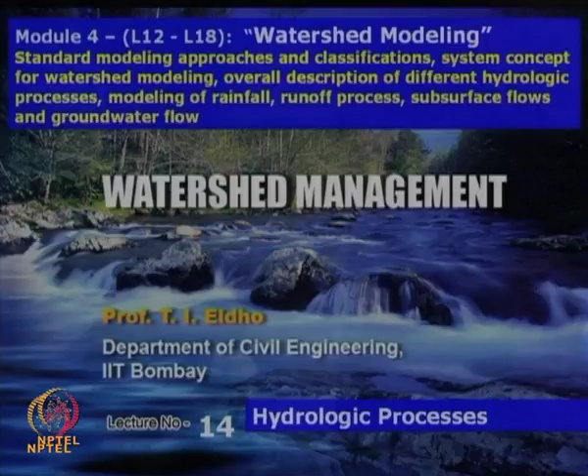In module number 4, lecture number 14, today we will discuss hydrologic processes. Various topics covered in today's lecture include hydrologic cycle, hydrologic processes, precipitation, interception, infiltration, evaporation, transpiration, evapotranspiration and runoff. Some of the important keywords for today's lecture: hydrologic cycle, precipitation, infiltration, evapotranspiration and runoff.

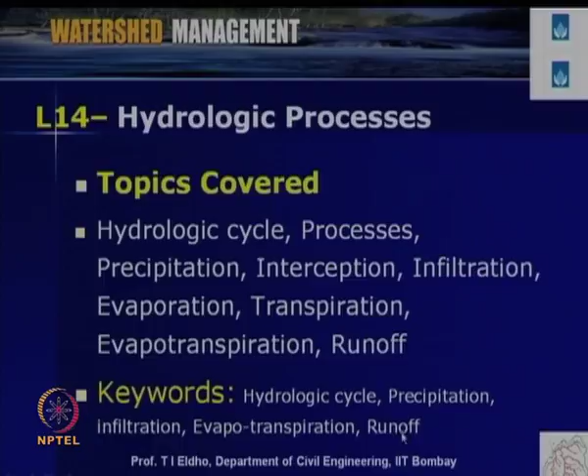As we already discussed related to watershed management, water is one of the most important resources as far as a watershed is concerned. For a watershed or any area, the main source of water is precipitation or rainfall. As we have discussed earlier, when the rainfall takes place, various hydrological processes will be taking place once that rainfall is transformed into runoff.

A number of processes will be there in between, like interception, evaporation, evapotranspiration, infiltration, percolation. So many processes are there. These processes actually decide how much will be the runoff for the given rainfall condition. The hydrologic information we are looking for is the water as a resource for watershed planning and management. Hydrologically, the watershed we can conceptualize as we discussed in the last lecture.

Once we do a conceptualization of the watershed, like the boundary of the watershed, the drainage network, the area of the watershed and various topographical and geographic conditions, then when we consider water as a resource, we have to see the various hydrological processes taking place within the watershed. From precipitation to runoff, as I mentioned already, there are a number of processes like evaporation, transpiration, interception, infiltration, etc.

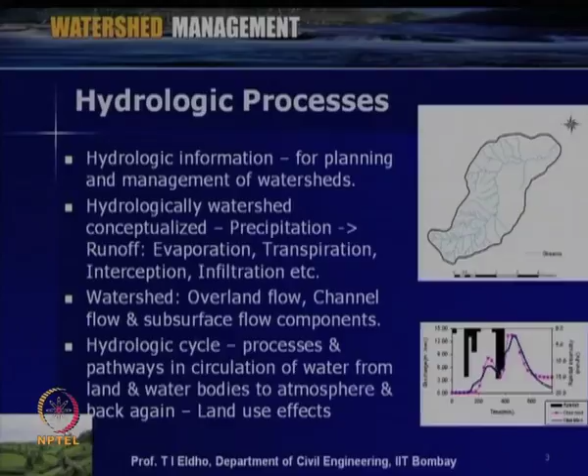Of course, as far as the various processes are concerned, land use has a considerable effect on the watershed. The various processes that can take place within the watershed depend upon the land use and the topographical conditions.

Within this context, the rainfall is taking place, then before the runoff is formed, evaporation takes place, then interception from the various vegetation, and then infiltration, and then finally the runoff starts, and that runoff joins the drainage network or the river, and that river finally flows towards the sea or the ocean. That is the way the various hydrologic processes take place within the hydrologic cycle. Everything is within the hydrosphere.

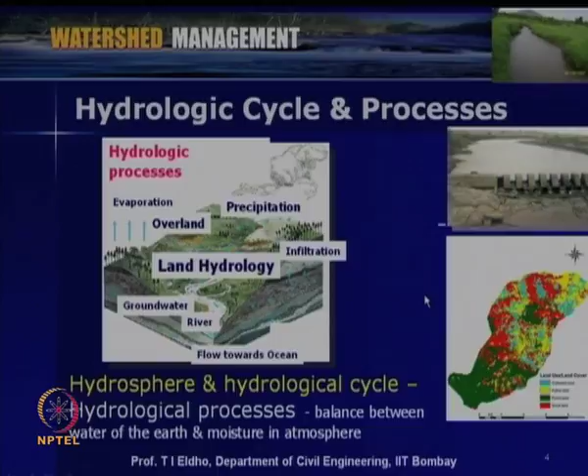There is a balance between the water of the earth and moisture in the atmosphere due to this hydrologic cycle. Of course, precipitation varies with respect to space and time, but overall there will be a balance between the water of the earth and the moisture in the atmosphere within the hydrologic cycle.

As we have seen, the most important aspect of water as a resource for a watershed is precipitation. Precipitation can be either in the form of rainfall or snowfall. We call it rainfall when the water droplets have a diameter of more than 0.5 mm, and we call it drizzle when it is less than 0.5 mm.

And then it can be either in the form of snow, that means in ice form, or sleet, or hailstone, or dew. So, various conditions can be there. So, overall, everything including rainfall and snowfall, we together call it precipitation.

As I mentioned, precipitation is the main source of water as far as the watershed or the earth is concerned. Out of these many forms, rain and snow are the most important forms of precipitation when we consider a watershed or the land. Precipitation happens when specific conditions take place within the atmosphere.

What is happening is that the water evaporates on the surface of the earth or the surface of the ocean, goes to the atmosphere, and then condensation takes place. Precipitation happens only during some specific conditions, like humid air cooled to dew point and formation of nuclei, and then droplets are formed into raindrops, and finally when the raindrops reach a certain size, only then precipitation happens.

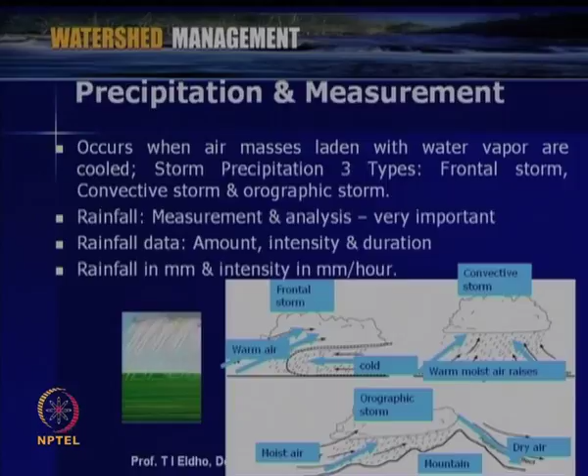So, generally we describe the rainfall in terms of depth of water, in millimeters, and the intensity of rainfall generally in millimeters per hour. So, as I mentioned, we have to measure the rainfall and quantify how much rainfall is taking place at particular locations. Rainfall we can measure as the vertical depth of water collected on a level surface. So, generally we measure the rainfall using equipment called rain gauges.

If you go through the hydrological literature, we can see there are two types of rain gauges. The first one is called the non-recording type rain gauge. Here, we collect the rainfall over a known period of time, so we cannot directly get the intensity, since we are simply collecting the rainfall. For example, this is the India Meteorological Department (IMD) standard gauge.

So, there is a collector with a gunmetal rim. This is the collector, and then there will be a funnel like this. And then there will be a polythene bottle where we can transfer this and find out how much is the rainfall. The collector area can vary from 100 square centimeters to 200 square centimeters, and the polythene bottle can be 2 liter, 4 liter and 10 liters, and measurement is by graduated measuring cylinder.

So, what we do, we install this rain gauge at a particular location without obstruction, in an open area, and then once a day at a particular time we measure how much rainfall took place, and that gives the total quantity of the rainfall.

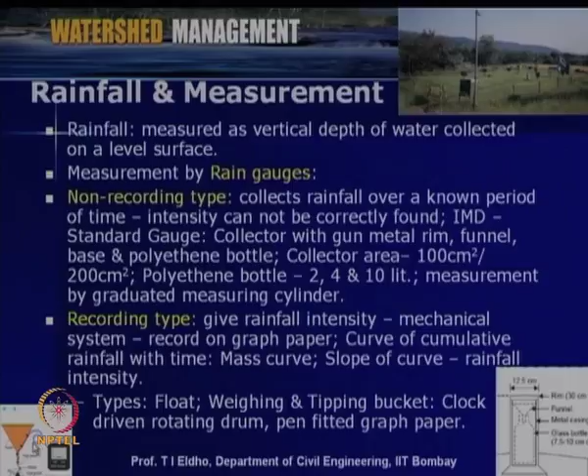So, some of the important terms as far as rainfall or precipitation is concerned: first is the rainfall intensity, second is the duration, and third is the frequency. Rainfall intensity, as I mentioned, is the rate at which rainfall occurs, generally in millimeters per hour. Duration is generally prescribed in number of hours or number of days. Another important term in hydrology is the so-called return period or recurrence interval.

This is the period within which the depth of rainfall for a given duration will be equaled or exceeded once on average. So, that is the definition of the return period or recurrence interval.

So, if T is the return period in years, we can put it in this form: T is equal to (n plus 1) by m, where n is the total number of hydrologic events and m is the rank of events arranged in descending order of magnitude. From that we can find the frequency or the probability of occurrence of an event. In percentage, we can put P is equal to 100 by T. So, this is in percentage, and that indicates the possibility of a return of a rainfall.

Then the intensity of a storm gives the return period and storm duration. We can have charts based upon the historic data. We can assess the historic data, for example, for 5 years, 10 years, 50 years or 100 years, and then we can identify, for a particular location or area, how the rainfall pattern is, the maximum intensity, average intensity, minimum intensity, and then we can find average annual rainfall. So, once we get the measured data from a rain gauge station, we can get various details as far as the rainfall pattern for the considered watershed.

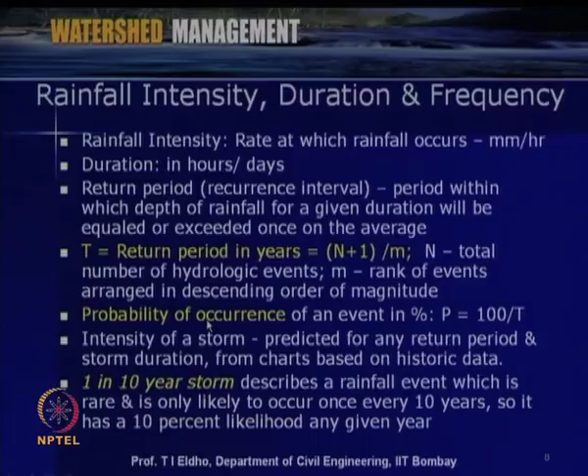For example, if the probability of occurrence is a 1 in 10 year storm, that describes a rainfall event which is rare and is only likely to occur once every 10 years. So, it has a 10% likelihood for any given year. Like that, once we get the rainfall data, we can assimilate it and then identify the rainfall intensity, average annual rainfall, the rainfall duration, the rainfall frequency, etc.

Then another important aspect is the average depth of rainfall over an area. When we go for hydrologic modeling, we can see that for the particular location which we consider, there may not be a rain gauge. So, in that case we may have to consider some averaging of the rainfall pattern for the given storm condition. The reason is that there are large differences in rainfall within short distances. Whenever we go from one location to another, there will be huge variation as far as the quantity of rainfall and rainfall intensity is concerned. That is why we may have to consider the average depth of rainfall for a particular location. Generally, three methods we use to get this average depth of rainfall.

The first one is called arithmetic average. For a particular area, we can identify the nearby rain gauge stations, and for a particular given storm, we can identify the rainfall in all those nearby rain gauge stations. Then we get the arithmetic average by simply adding all the rainfall for the given storm condition and dividing by the number of stations. So, that is a simple average, called the arithmetic average. Generally, with this arithmetic average the accuracy will be very less, since we simply sum the rainfall for the given storm and divide by the number of stations. But there are more accurate methods like the Thiessen method and the isohyetal method.

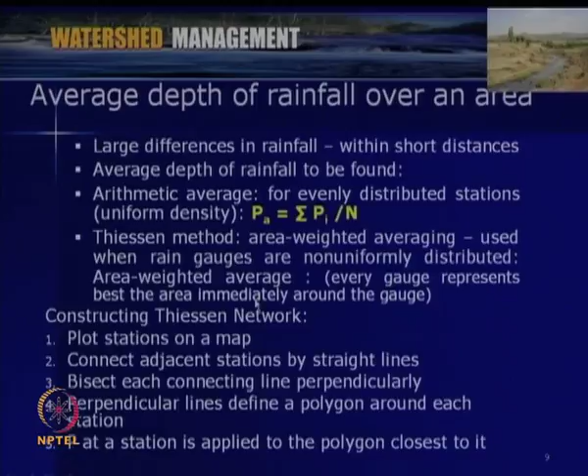Then the rainfall P at a station is applied to the polygon closest to it. This figure shows how we do it using the Thiessen method. The average depth of rainfall in that particular area will be P = (A1 P1 + A2 P2 + ... + AN PN) / A, where A is the total area of the watershed. P1, P2 to Pn are rainfall depths in the polygons having areas A1, A2 to AN within the watershed.

So, if we do not have a large number of rain gauges for a given watershed, we can use the adjacent nearby rain gauge stations, identify how much is the rainfall for a given storm at those rain gauge stations, and then we can use this method.

The third method is called the isohyetal method. Here, at various stations we get the rainfall for the given storms, record the depth of rainfall at the locations of different rain gauges, and then plot contour lines called isohyets. These are the lines of equal rainfall. For example, a 50 centimeter isohyet, then a 45 centimeter isohyet, then a 40 centimeter isohyet. We can plot the isohyets over the area which we consider.

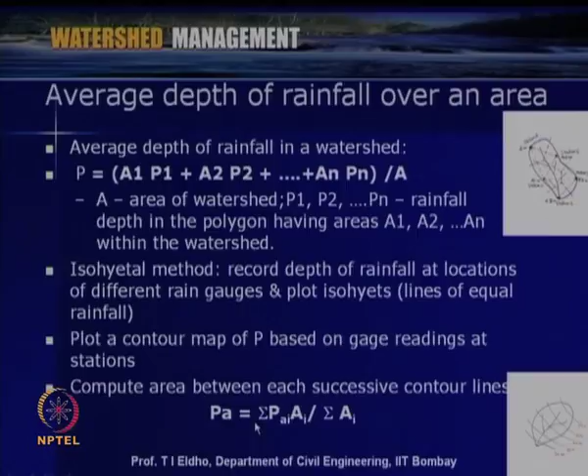This will be a somewhat more accurate method, since we are getting these isohyets and the areas from them. So this formula gives the average rainfall using the isohyetal method. That way we can identify the rainfall for a particular station, location or watershed using either the arithmetic average, the Thiessen polygon method or the isohyetal method.

Once we get the rainfall for the particular watershed, to identify how much will be the runoff, we can look into the various hydrologic processes taking place within the watershed. As I mentioned earlier, in the transformation of precipitation to runoff a number of processes will be there. We consider the important processes for the particular watershed, and then quantify the losses, like interception losses, evaporation losses or infiltration losses. Based upon that we can identify how much runoff will be coming to the outlet of the watershed.

From that we can assess how much water there is if we are going to construct, for example, a check dam at the outlet. So this much storage is possible with respect to the given rainfall condition.

Now, considering the various hydrologic processes, we will discuss some of the important ones, along with the available important equations for quantification and the methodology. We will identify how to go through the various processes, and then finally how much will be the runoff. So now we will discuss the various hydrologic processes.

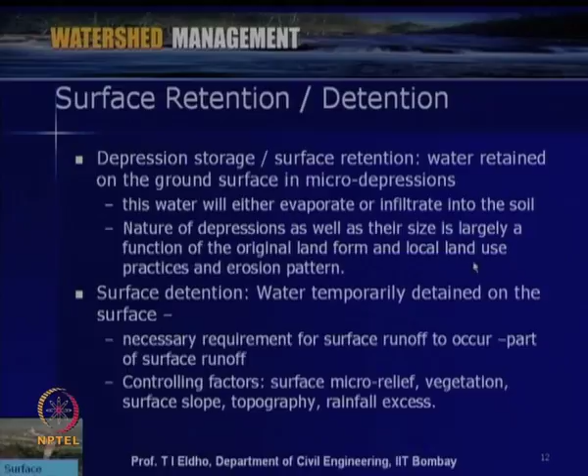And then the next very important hydrologic process is so-called infiltration. Actually, that is one of the most important hydrologic processes, which decides, when we consider precipitation to runoff, how much will be the water loss. Actually, it is not a loss; it is going through the soil to the aquifer system. So, this infiltration we will now discuss in detail.

So, some of the important controlling factors as far as infiltration is concerned: soil type, like size of particles, degree of aggregation between the particles, arrangement of particles, what kind of soil it is, clay soil, sandy soil, then vegetative cover. So, whether the vegetation cover is, say, grass, or what kind of vegetation cover is there, either forested or non-forested.

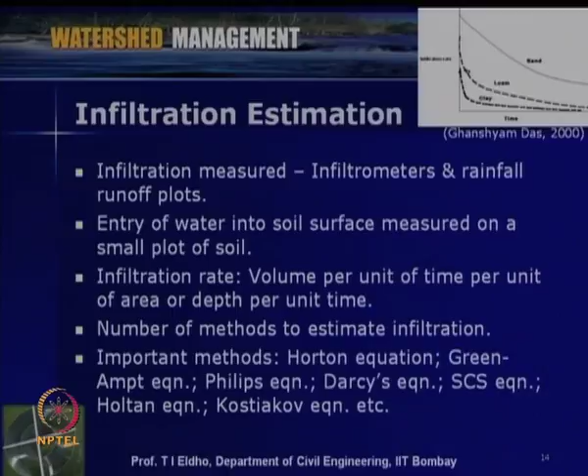So, as I mentioned, a number of methods are available to estimate the infiltration. Some of the important methods include Horton's equation, Green-Ampt equation, Philip's equation, Darcy's equation, Soil Conservation Service curve number equation, Holtan equation, Kostiakov equation, like that. So, depending upon the data availability for the particular location and the accuracy we are looking for, we can choose a particular infiltration estimation method and then calculate the infiltration.

So, here we will discuss 2-3 important methods. One of the commonly used methods is the Horton equation. Here the assumption is that infiltration starts at a constant rate f0 and decreases exponentially with time t. So, the equation is ft = fc + (f0 - fc) e^(-kt), where ft is the infiltration rate at time t, the initial or maximum infiltration rate, and the constant or equilibrium infiltration rate after the soil has been saturated, or minimum infiltration rate. Then k is the decay constant specific to the particular soil. So, this Horton equation we can utilize.

Then another commonly used equation is the Philip infiltration model. The equation is f = ½ Si t^(-1/2) + K, where Si is the infiltration sorptivity, K is hydraulic conductivity, which is considered equal to saturated hydraulic conductivity Ks, and t is the time.

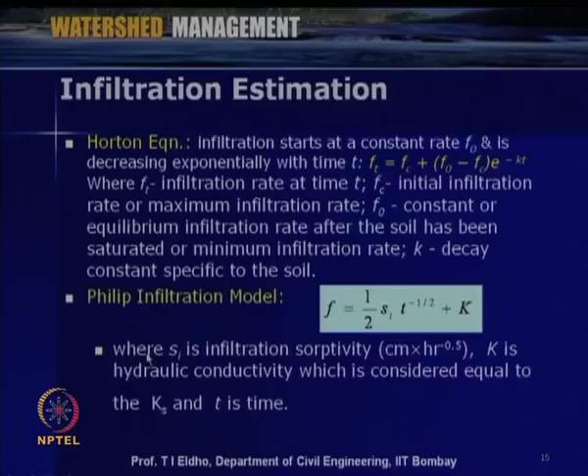So, the Philip infiltration model is another commonly used infiltration model, and another infiltration equation is the so-called Holtan equation. Here the equation is f = GI·A·Sa^1.4 + fc, where f is in inches per hour, GI is a growth index that ranges from 0.1 to 1, a is the macropores associated with the plant roots, fc is the steady state infiltration rate, and Sa is the available storage in the surface layers.

So, like this, various equations are available. So, depending upon the data availability and depending upon the soil nature and other conditions, we can choose a particular equation to estimate the infiltration.

So, if we are not going for very complex equations like Horton or any of these equations, we can consider that a certain percentage of the rainfall is going as infiltration. So, we can describe it in terms of an infiltration index for determination of loss of rainwater due to abstraction. This method assumes a constant value of infiltration capacity for the full duration of the storm, like the phi index.

So, we can consider average abstraction of rainfall like 10%, 20% or 30% like that. So, phi index, and another index is called the W index. This considers initial abstraction, and it is very difficult to determine the correct values of initial abstraction. So, commonly with this phi index, we can simply say that this much percentage of the precipitation is going as phi index.

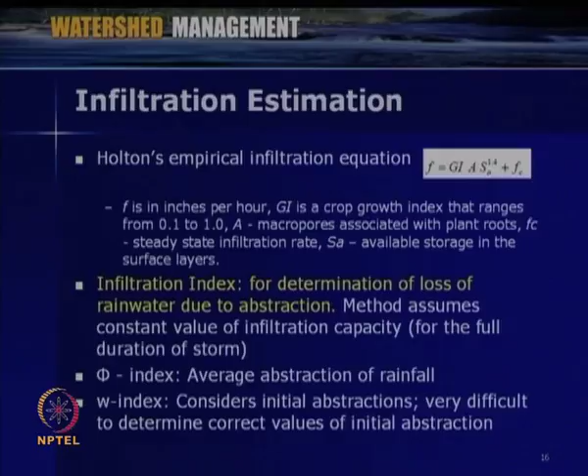But if sufficient data is available and if we are looking for an accurate measurement of the infiltration, then we have to use various models like Philip's model or Horton's empirical infiltration equation like that. So, this is about the estimation of the infiltration. As I mentioned, infiltration is one of the most important hydrologic processes which we have to consider, and the precipitation to runoff depends upon how much is the percentage of the infiltration taking place at the considered location.

So, now we will discuss some of the other important hydrologic processes. The next one is evaporation. As I mentioned, when the rainfall is taking place continuously, the evaporation loss may be less, but otherwise evaporation is taking place from all the surface water bodies or from the soil, or as transpiration and evaporation from the plants. So, all this is taking place. Evaporation is another important hydrologic process which we have to consider.

So, evaporation is the process where liquid water is transformed into a gaseous state at a temperature less than the boiling point through the process of transfer of heat energy. Evaporation of water occurs when the surface of the liquid is exposed, allowing molecules to escape and form the water vapor. This vapor can then rise up and form the clouds. So, you can see evaporation from the water surface taking place, and then cloud formation taking place, and that is a part of the hydrologic cycle.

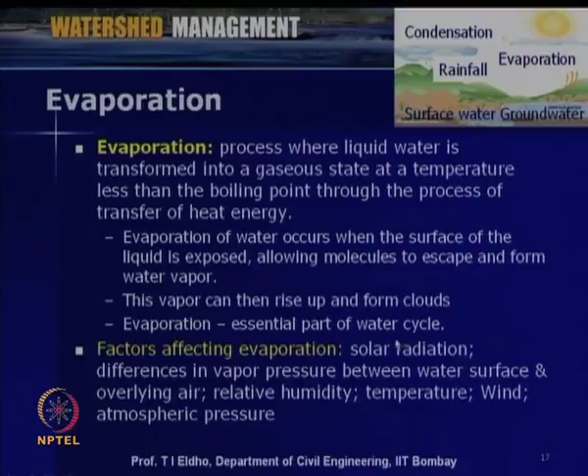Then the important factors affecting evaporation, here I have listed, like solar radiation, differences in vapor pressure between water surface and overlying air, then relative humidity, temperature, wind, atmospheric pressure, etc. So, there are a number of factors affecting the evaporation. Some of the important factors I have listed.

So, now when we are looking for water resource assessment as far as a watershed is concerned, we have to identify how much is the evaporation loss, for example from the lakes, from the reservoirs, from the river, or any other water body, and then of course the various other losses from the soil, etc. Now, the exact measurement of evaporation is very difficult. So, generally for large water bodies we can conduct some experiments, or we can use some equations which are already developed.

So, from open water surfaces we can measure the evaporation using various equipment like atmometers, evaporimeters, or open pans. This shows a typical pan. This photo is taken from this website. So, we can fill this pan, and then with respect to time see how the variation in depth takes place. Accordingly, we can identify how much is the evaporation loss.

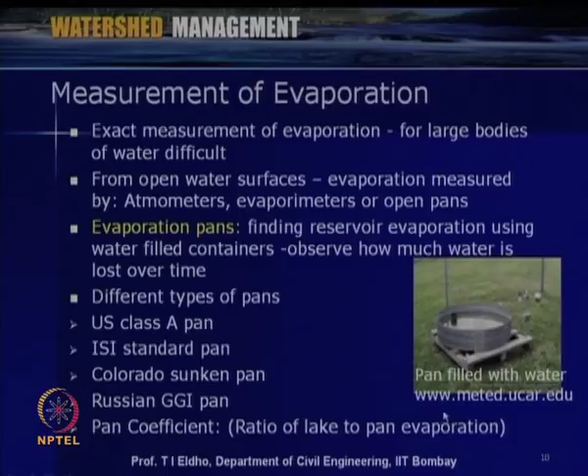So, evaporation pans give the evaporation using water filled in containers like this. We can observe how much water is lost over time. Different types of pans are available, like US Class A pan, ISI standard pan, Colorado sunken pan, Russian GGI pan, like that. So, we can identify a coefficient called the pan coefficient, which is the ratio of lake to pan evaporation. We can identify the coefficient and then multiply to identify how much evaporation is taking place for the given water body, reservoir or lake which we consider.

So, other than these experimental measurements, we can also estimate using various equations or various methodologies listed here, like the water budget method.

So, from ponded water, lakes or reservoirs, we can account for all the inflows and outflows, and then we can identify how much is the evaporation. Then the energy budget method, based on application of the law of conservation of energy. So, we can identify how much energy is taken for evaporation, and from that we can calculate the

evaporation. Then mass transfer, so-called aerodynamic methods. This is based on turbulent transfer of water vapor from an evaporating surface to the atmosphere. A number of mass transfer models are available in literature. Then a combination of mass transfer and energy budget methods.

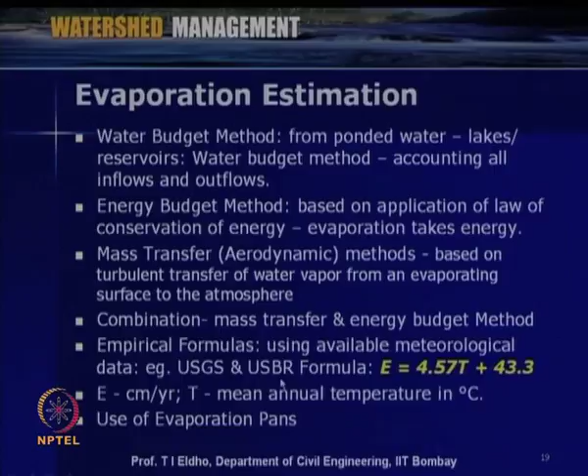Also a number of empirical formulas are used for evaporation estimation, like the USGS and USBR formula, where evaporation E = 4.57 T + 43.3, where E is the evaporation in centimeters per year and T is the mean annual temperature in degrees centigrade. And as I mentioned, evaporation pans also we can utilize.

Evaporation is a major loss as far as surface water reservoirs are concerned. Depending upon the area, like in humid tropic areas, evaporation losses from reservoirs or lakes can go to 30%, 40% or even up to 50%. So, if we can control the evaporation by using various measures, we can reduce it and have better use of the available water.

Here I have listed various evaporation control measures, like storing water in covered reservoirs, making increased use of underground storage, controlling aquatic growths, building storage reservoirs with minimal surface areas, conveying in closed conduits rather than open channels, and applying a thin chemical or monomolecular film, like

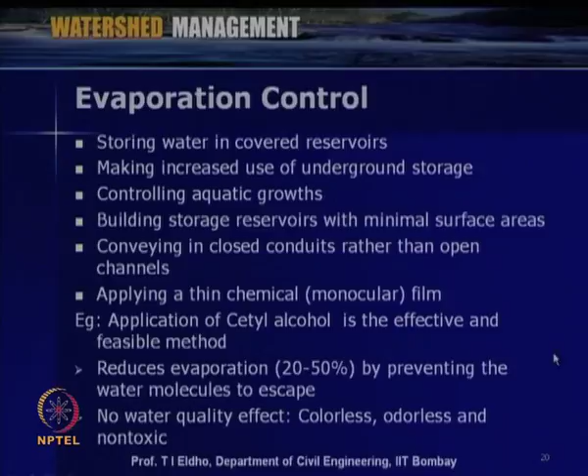cetyl alcohol, which reduces evaporation by about 20 to 50% by preventing the water molecules from escaping the water surface. It is slightly expensive, but there is no water quality effect; it is colorless, odorless and non-toxic. So we can use this chemical film to control evaporation. If we reduce evaporation, the water stored in lakes or reservoirs can be used for dry periods.

Nearly all water taken up is lost by transpiration and only a tiny fraction is used within the plant. The plant takes a lot of water through its roots, photosynthesis takes place, and much water vapor is lost as transpiration through the stomata. Transpiration depends on energy supply, vapor pressure gradient and wind, soil water content, the ability of the soil to conduct water to the roots, crop characteristics, environmental aspects and cultivation practices.

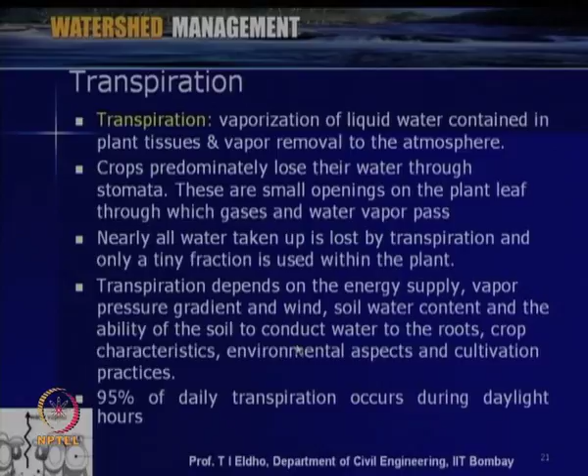Most transpiration takes place during the daytime; 95% of daily transpiration occurs during daylight hours. Most of the time it is very difficult to separate transpiration and evaporation, which is why we use the term evapotranspiration. When soil moisture lies between wilting point and field capacity, there is no effect on transpiration. To measure transpiration for a given plant, we can use an instrument called a phytometer.

As I mentioned, it is very difficult to separate evaporation and transpiration, so we use the term evapotranspiration. Evaporation and transpiration occur simultaneously, and there is no easy way of distinguishing between the two processes. For the plant, water is taken through the root, and some water goes as evaporation and some as transpiration.

Some important definitions for evapotranspiration. First is potential evapotranspiration, PET. This is the rate at which water, if available, would be removed from the wet soil and plant surface, expressed as the latent heat transfer per unit area or its equivalent depth of water per unit area.

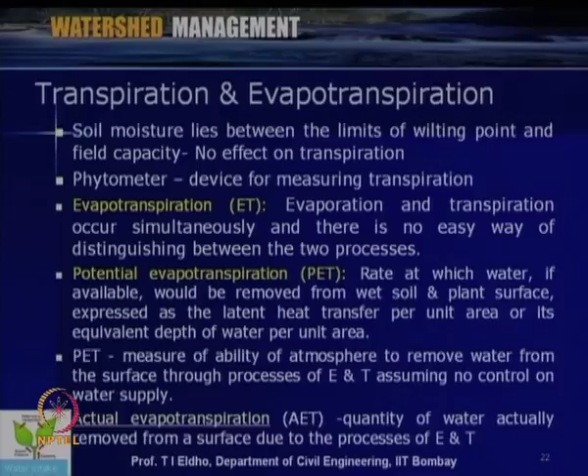And then this PET is the measure of ability of atmosphere to remove water from the surface through the process of evaporation and transpiration, assuming no control on the water supply. Then another important definition is so-called actual evapotranspiration. This is the quantity of water actually removed from a surface due to the process of evaporation and transpiration.

So, now we can also estimate the evapotranspiration using various equations. So, like the crop water need is actually potential evaporation minus actual evapotranspiration, and we can put a coefficient called crop coefficient, which is the ratio of actual evapotranspiration to potential evapotranspiration.

So, there are various theoretical methods like Blaney-Criddle and Penman-Monteith methods. Then empirical methods like the Thornthwaite method, then field methods like lysimeter, field plots, soil moisture depletion studies, etc. Also we can use analytical methods like energy or water budget methods, like for evaporation. So, here also we can use the analytical method as far as the estimation of evapotranspiration is concerned.

So, for example, one of the commonly used methods is the so-called Blaney-Criddle method. Here the assumption is consumptive use of water by crops is related to mean monthly temperature and daylight hours. So, this provides a rough estimate. For extreme climate conditions the method is inaccurate. So, this depends upon whether the areas are windy, dry or sunny.

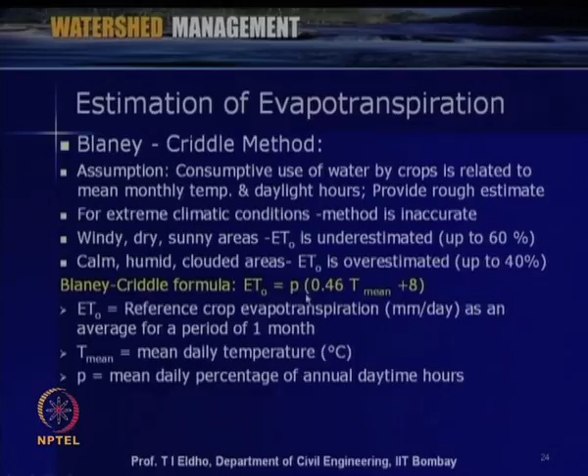So, here the reference crop evapotranspiration is obtained by P into (0.46 T mean plus 8), where P is the mean daily percentage of annual daytime hours for the particular location, and T mean is the mean daily temperature. So, this equation we can utilize depending upon the area. This P can be identified, and once the temperature is known, we can identify how much is the evapotranspiration for the given location.

So, now after all these losses, the next step is the surface runoff taking place. Surface runoff is the part of precipitation which during and immediately after a storm event appears as flowing water in the drainage network of a watershed. This results from the direct movement of water over the surface of the watershed, precipitation in excess of abstraction demand, or emergence of soil water into waterways. The surface runoff generally occurs when the rate of precipitation exceeds the rate of infiltration. So, that is one of the essential conditions.

So, there are a number of controlling factors which decide the surface runoff, like climatic factors: precipitation intensity, duration, areal distribution and storm pattern, then evaporation and evapotranspiration. Then physiographic factors like watershed characteristics: size, shape, land use, infiltration rate, slope, etc. Then channel characteristics like size, cross section, slope, roughness of channel bed, and then the drainage pattern and density of the drainage of the area which we consider.

So, as far as the surface runoff is concerned, we can classify it into overland flow and channel flow. You can see what is happening within the watershed. If rainfall exceeds the soil infiltration capacity, water fills surface depressions, then water spills over downslope as overland flow and eventually to the stream or the channel, and that is so-called channel flow. Surface runoff is generated either by rainfall or by the melting of snow or glaciers.

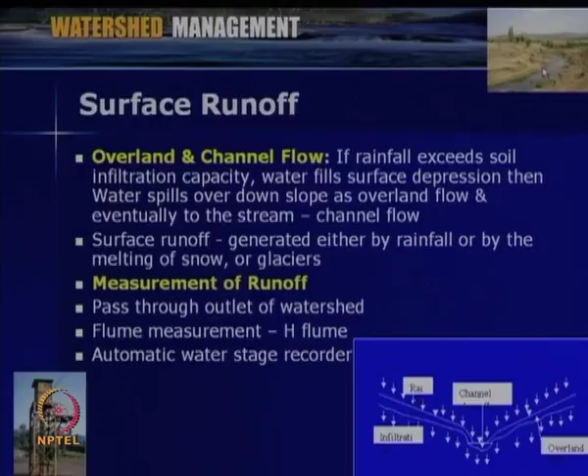As far as the runoff in a channel is concerned, we can measure it using an H flume or various automatic water stage recorders, to measure the runoff happening at the outlet of a watershed or a particular location of the stream or river.

Then if we consider the various runoff mechanisms, runoff from precipitation takes place by infiltration excess overland flow. This is so-called Hortonian or unsaturated overland flow. This occurs when the rate of rainfall on a surface exceeds the rate at which water can infiltrate the ground and any depression storage has already been filled. So, that is so-called Hortonian or unsaturated overland flow.

Then the second mechanism is saturation excess overland flow. When soil is saturated and depression storage is filled, and rain continues to fall, rainfall will immediately produce some surface runoff. So, that is so-called saturation excess overland flow.

Then the runoff depends upon the antecedent soil moisture condition. Soil retains a degree of moisture after rainfall. The residual moisture affects the soil infiltration capacity. So, depending upon the antecedent soil moisture, when the next rainfall takes place, either faster runoff or slow runoff takes place. Then finally, the subsurface return flow, so-called throughflow. After water infiltrates the soil on an upslope portion of a hill, water may flow laterally through the soil, so-called exfiltration.

So, flow out of the soil. So, this is close to a channel. So, finally, this will be also the part of runoff. So, various surface runoff mechanisms are there as far as the precipitation to runoff is concerned.

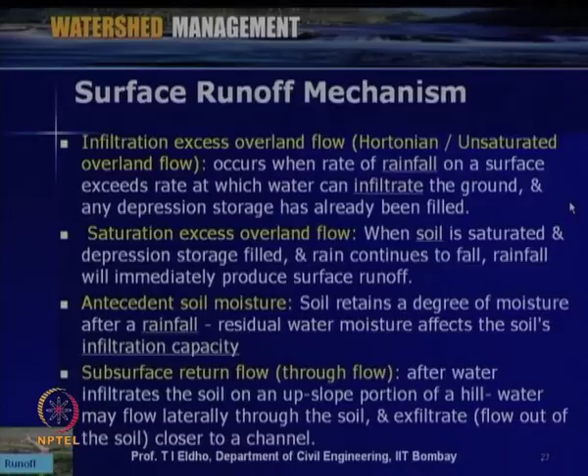So, finally, the steps to hydrologic modeling. So, what we can do, we can delineate the watershed, then we can identify the various hydrologic processes. We can obtain the hydrologic and geographic data, then select various modeling approaches as far as various hydrologic processes are concerned, and then we can estimate the various quantities. Then we may go for calibration, verification, and then we can use the particular models for the assessment or prediction as far as precipitation to runoff is concerned.

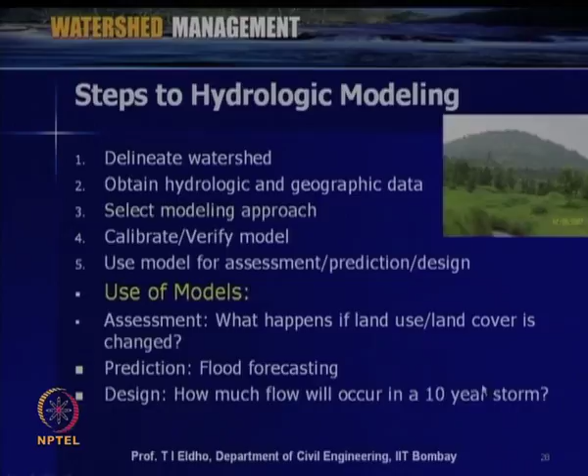So, we can use models; we will be discussing these various models in the next lecture. As far as the model is concerned, we have to assess what happens if land use and land cover is changed. Then we can go for a prediction mode, say for the given rainfall condition, how the flooding can take place. Then we can go for design also, how much flow in a 10-year storm or 5-year storm can take place.

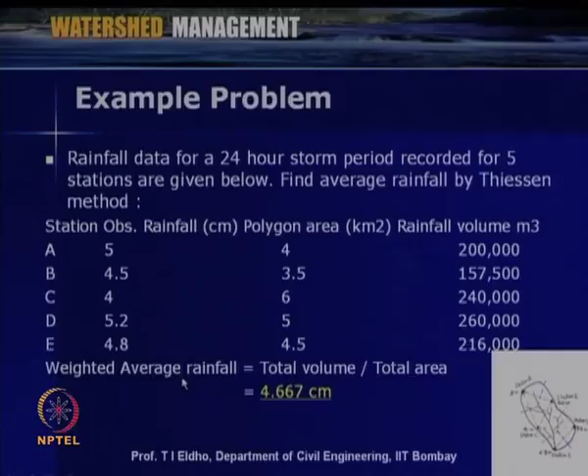So, before closing this lecture, we see here two example problems. The first one is use of the Thiessen method to identify the average rainfall. Here in this figure you can see 5 rain gauge stations; the observed rainfalls are given here. Then the polygon area we can identify as we discussed. Then we can identify the rainfall volume. For station A, the rainfall multiplied by the polygon area gives the volume. Then we can sum it up and divide by area, which gives the weighted average rainfall for that particular storm which we consider. So, that is the use of the Thiessen polygon method.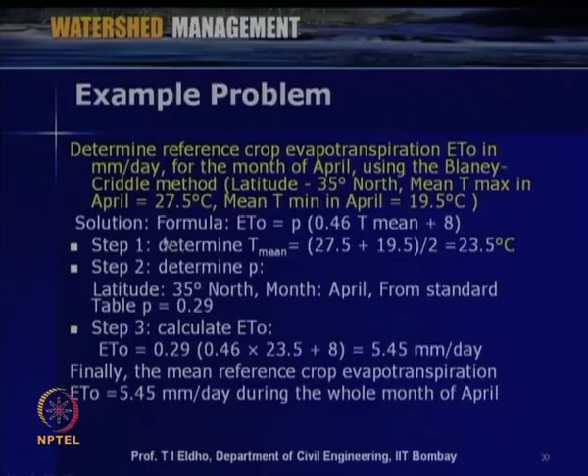Then to calculate the evapotranspiration, say you want to use the Blaney-Criddle method. For example, temperature is given as 27.5 and 19.5, the maximum and minimum for April. Then we can use this Blaney-Criddle equation. From the given latitude we can identify the p value as 0.29, and then we can calculate the reference crop evapotranspiration by using this equation. So, this shows how we can use the Blaney-Criddle method.

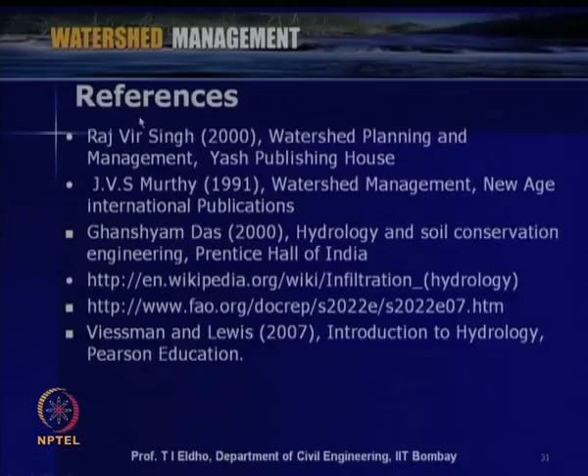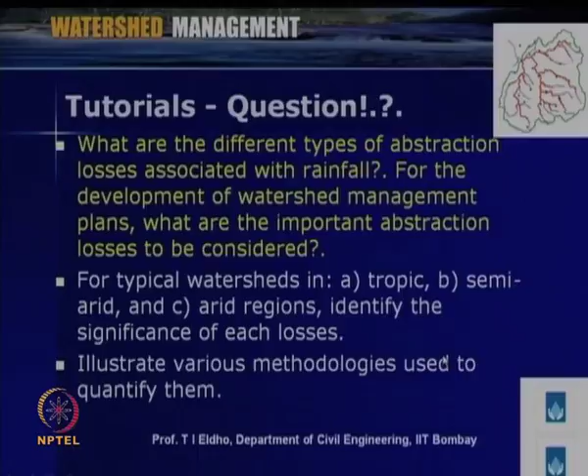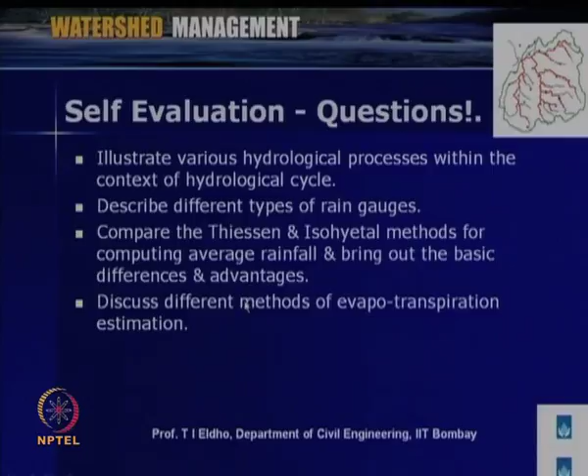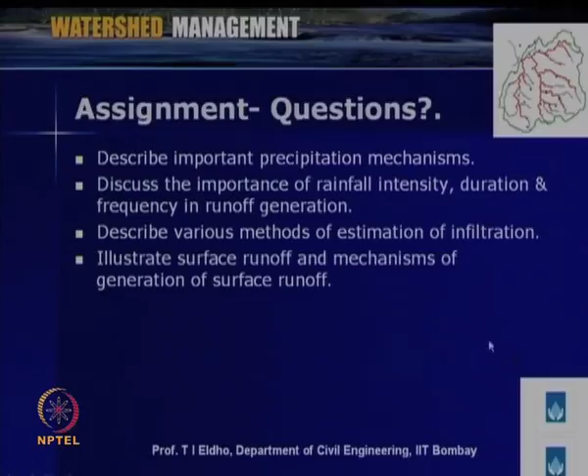Then a few self-evaluation questions: illustrate various hydrological processes within the context of the hydrological cycle. Describe different types of rain gauges, compare the Thiessen and isohyetal methods for computing average rainfall and bring out the basic differences and advantages. Discuss different methods of evapotranspiration estimation. And a few assignment questions: describe important precipitation mechanisms, discuss the importance of rainfall intensity, duration and frequency in runoff generation. Describe various methods of estimation of infiltration, then illustrate surface runoff and mechanisms of generation of surface runoff. We have discussed the details in today's lecture, so once you go through the lecture you can answer all these questions.

Now one unsolved problem: for your watershed area, obtain the rainfall data from the nearby rain gauge stations for a few storms, and using various methods like arithmetic mean, Thiessen mean method, and isohyetal method, compute the average rainfall by all methods and compare. So, we can identify the advantages and limitations of each method. Once you get the rainfall data, you can draw isohyets for the given area and construct the Thiessen polygon as we discussed earlier. Then we can compute the average rainfall for the given storm conditions.

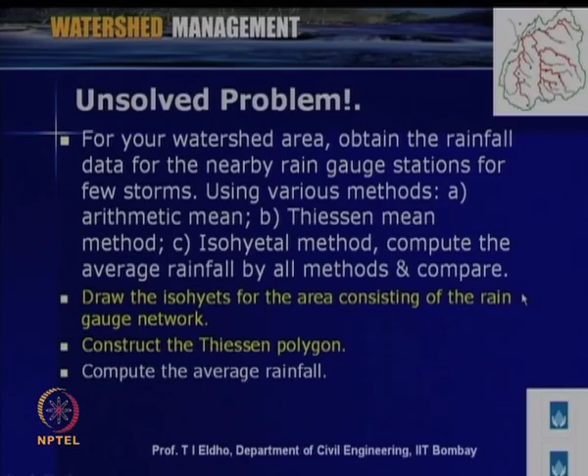So, today what we have discussed is the various hydrologic processes, and we have seen various equations to estimate the various processes. Based upon this, in the next lecture we will discuss hydrologic modeling as far as precipitation to runoff. We will discuss in detail the various models and how we can go for watershed modeling based upon these models. Thank you very much.